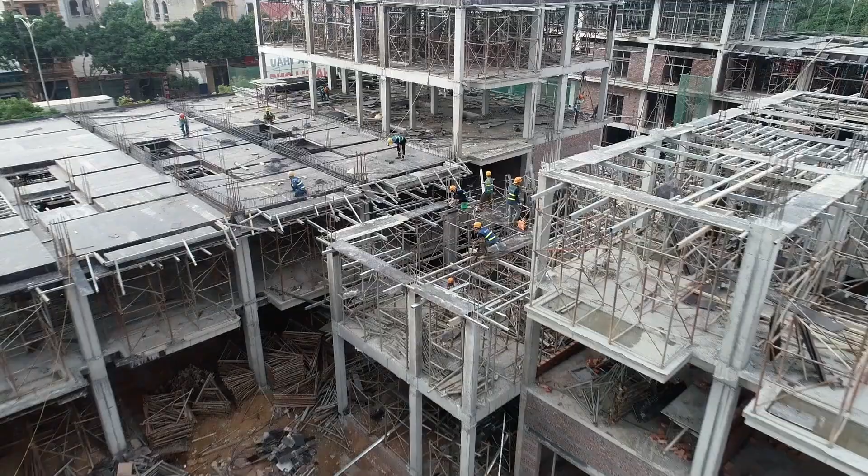Have you ever stared at a reinforcement drawing and felt completely lost, trying to figure out what bars go where, how many you need, or how to calculate their total length? Or maybe you're responsible for estimating reinforcement for beams but you're not quite confident that your quantities are accurate. If this sounds like you, you are in the right place.

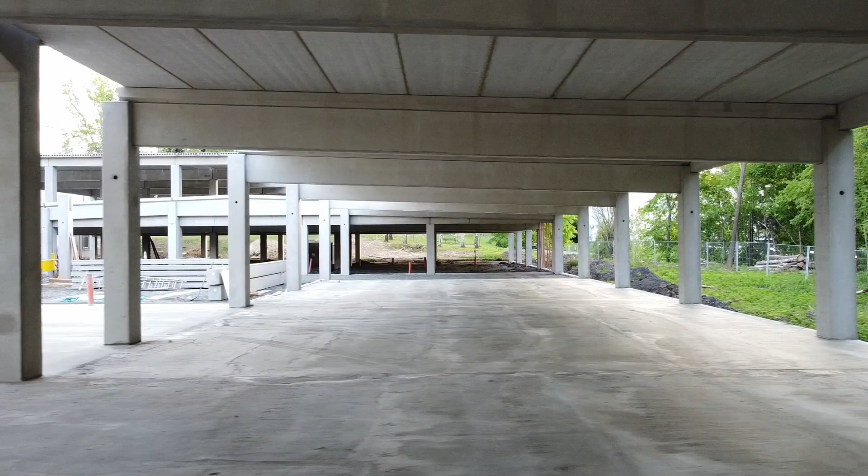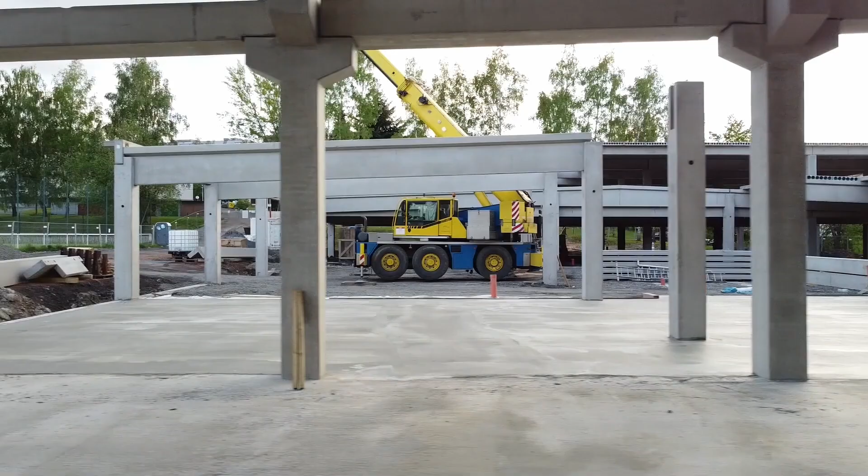In today's video, we are focusing on something every quantity surveyor, estimator, site engineer, or even civil engineering student must understand: how to take off reinforcement in beams. Beams are one of the most essential load-bearing elements in reinforced concrete structures. They serve as the horizontal support system, transferring load from the slab to the column and eventually to the foundation. Because they play a crucial role, they are usually packed with different types of reinforcement: bottom bars, top bars, crank bars, stirrups, anchorage, and more, all carefully designed and laid in structural drawings.

But how do you move from those complex-looking drawings to actual quantities of steel in kilograms or tons? How do you know how many bars are required? What about the length, laps, bends, hooks, and even cutting allowance? In this video, I'm going to walk you through the entire process of taking off reinforcement in beams, step by step, no guesswork, no skipping, with clear explanations and practical examples. Now let's get right into it.

This is a drawing of our reinforced beam. This can be located anywhere - it might be a ground beam or an upper floor slab beam. The main purpose of this video is to provide relevant information on how to take off for a reinforced beam, no matter where it is located. Now let's get into it.

The section of our beam is 450 by 225 - the depth is 450 and the width is 225. Most of our drawings for beams or any structural work are drawn to center to center, so this is drawn center to center.

Now that we know the width of our beam is 225, and it is drawn to center, the first thing to do is make our dimension external to external. How do we get that? Since this is center, that's half of 225 to this side and half of 225 to this side - making 2 of half of 225. When you multiply 2 by half, you get 1, multiplied by 225, so you're adding one 225, that's one width to the dimension, in order to get the external to external dimension.

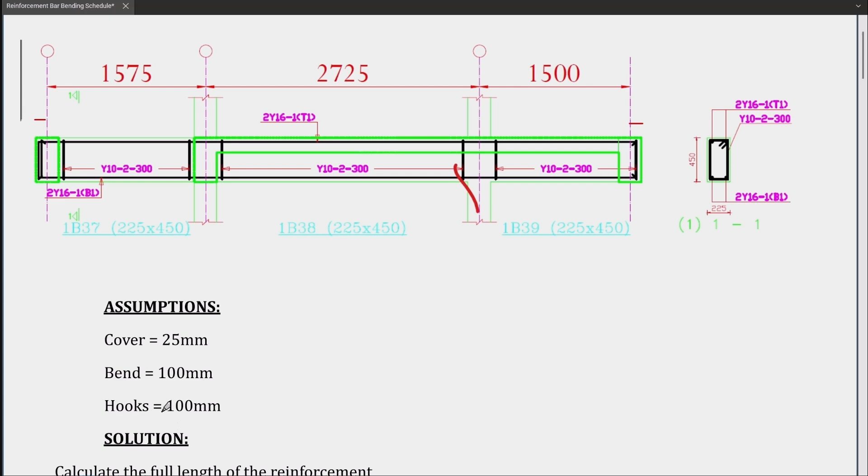So the cover to our reinforcement is 25mm - that means the distance from the face of the concrete to where we have our reinforcement is 25mm. Then this point here, the hook, is where we have links or stirrups. So I'm moving forward now.

The first thing to do is get the total length, that's from external to external. Remember I said half of 225 - that's 2 multiplied by half multiplied by 225, so that's 2 over 2 multiplied by 225, invariably 1 multiplied by 225, plus 1575 plus 2725 plus 1500.

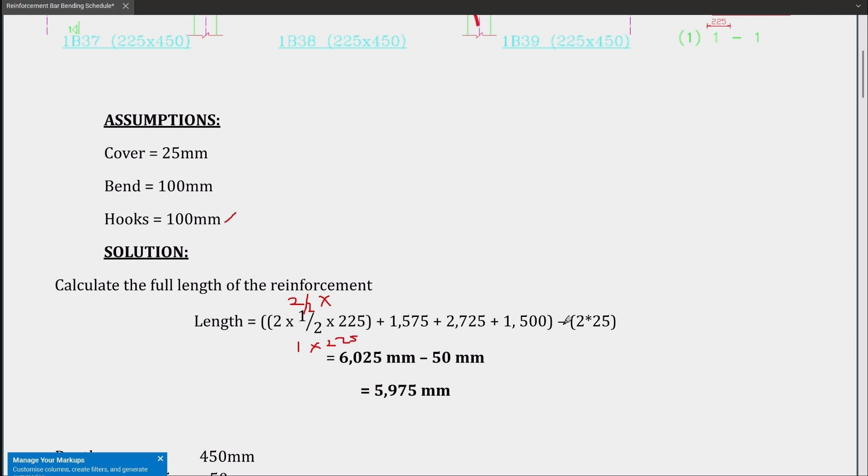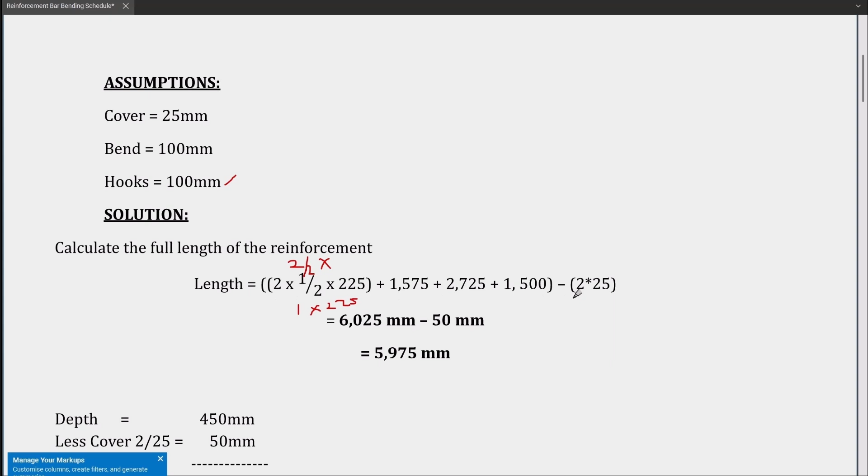This is the dimension here. Remember, we need to get the location of our reinforcement - that's why we are deducting 2 cover: cover to this side and cover to this side, that's 25 to one side, 25 to the other side, 25 multiplied by 2 we have 50. So when we add everything together we have 6025mm minus 50, that's the cover of our reinforcement. After deducting cover from the whole length, we have 5975 - now we have the length of our reinforcement, from this point to this point is 5975mm.

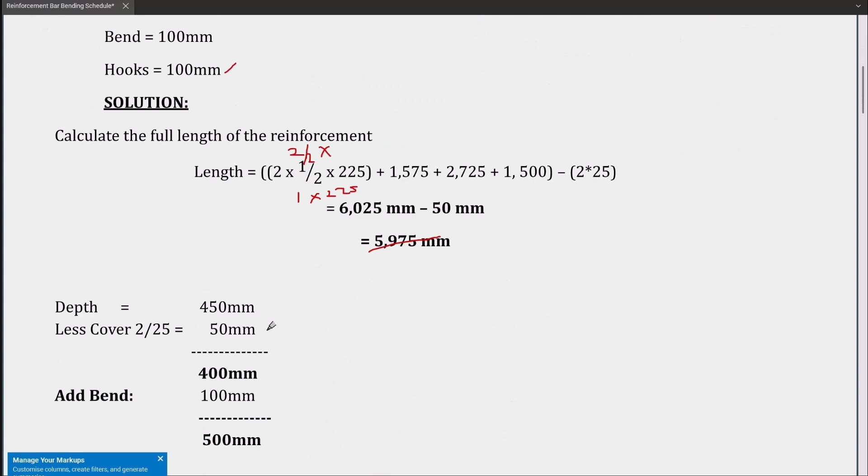We need to get this length also, the length on the depth at this point. Remember we have 450 here, we need to deduct cover also - 25 here and 25 here, 25 multiplied by 2 we have 50, so 450 minus 50 we have 400.

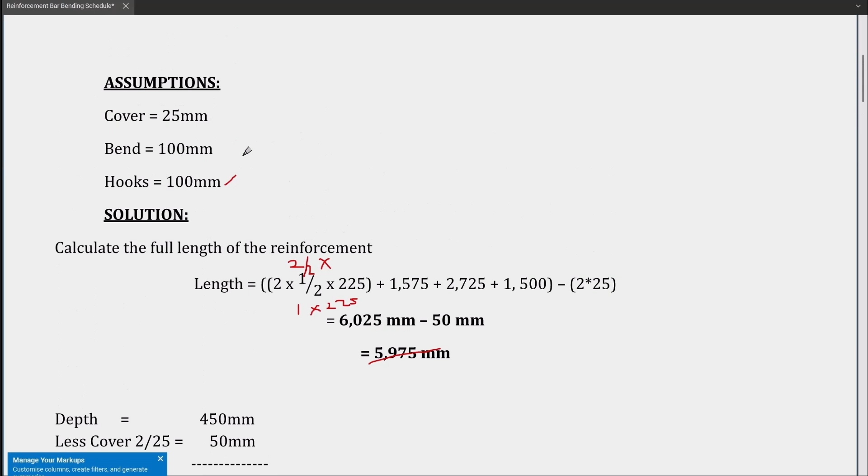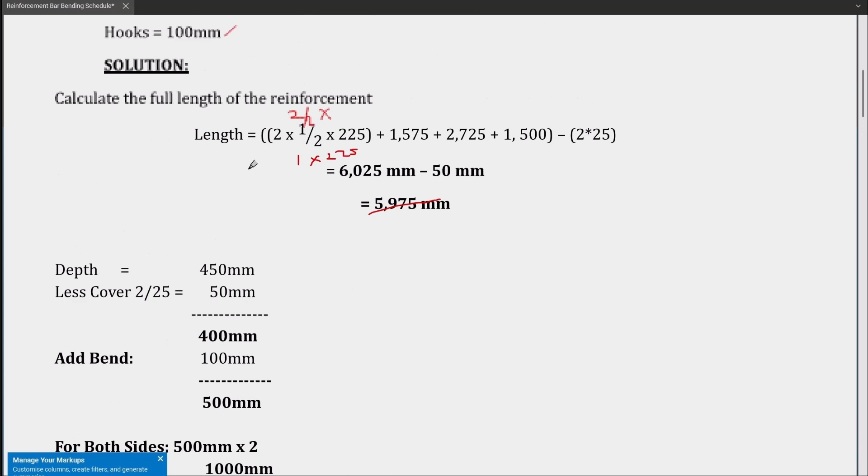Remember, we have the bend here, so we'll be adding bend to one side - we can't add both sides, so when we need to multiply, that is when we multiply by 2. If we multiply by 2 it's going to be over-measurement. So 100 here plus the 400 we calculated here equals 500. From the point up to this curve is 100mm. Since we have two sides, it's going to be 500 multiplied by 2 equals 1000.

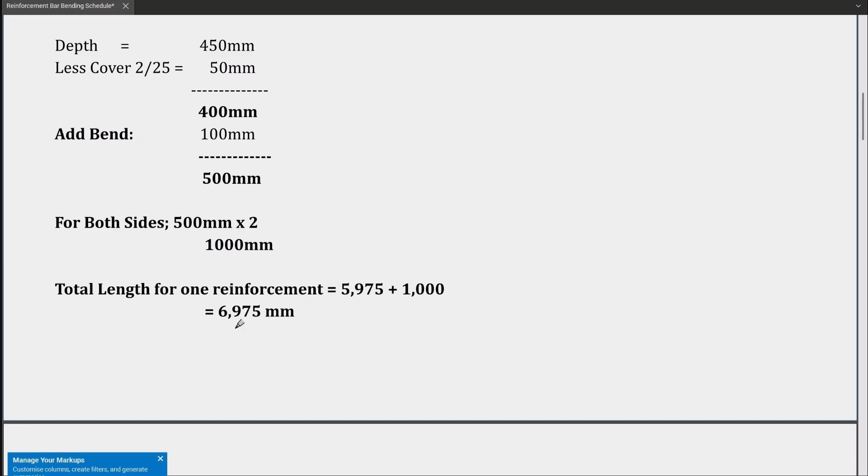In order to get the total length of our reinforcement, that's one reinforcement, from this point to this point, up to this point, going along this line to this point and back here. So when we add them together, 5975 plus 1000, we have 6975mm. So the total length of one reinforcement, from this point to this point, is 6975mm. So moving forward, the quantity - we have 2 here.

This is the quantity of our reinforcement, this is the diameter, this is the bar mark, and this is the location - this is at the top. So we have 2 of 16mm at the top and 2 of 16mm at the bottom, and it is one quantity. So that's 2 multiplied by 2, we have 4, multiplied by 6975, we have 27,900mm or 27.9 meters.

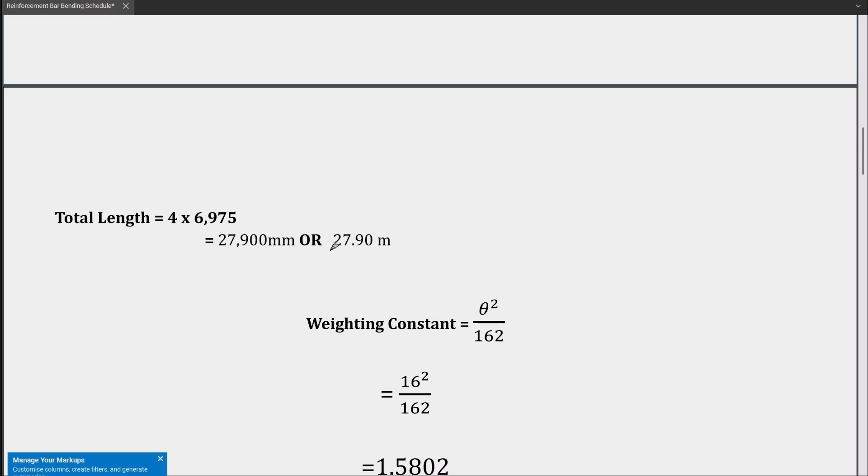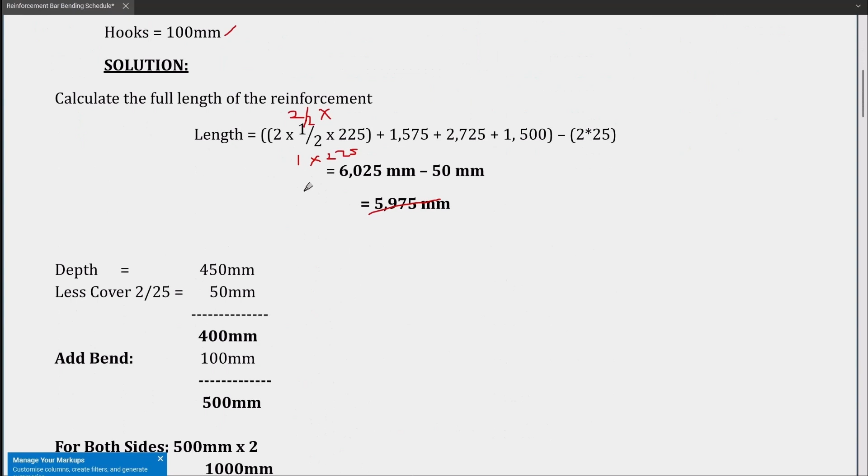So we need to calculate the weighting constant, that's the weighting constant of our reinforcement. Since we are using 16 mm from this drawing, it's going to be diameter square divided by 162. This is a standard formula for calculating the weighting constant of any reinforcement.

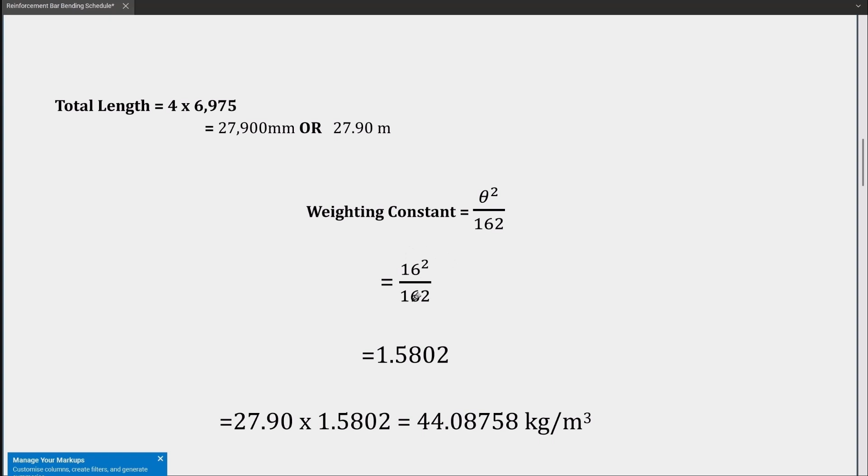If you have 8 mm, you do 8 mm square. So any diameter that you have, to get the weighting constant, you square the diameter divided by 162. Since we have 16 mm, 16 multiplied by 16 divided by 162, we have 1.5802. So in order to get the total quantity of our reinforcement in kg per meter cube, the total quantity we calculated here, that's 27.9 meters, multiplied by 1.580, we have 44.08758 kg per meter cube.

One of the reasons why I write the whole formula without rounding it up until the last part is, reinforcement is very expensive and any mistake can cost a lot. So that's why I leave it until the last part in order to round it up.

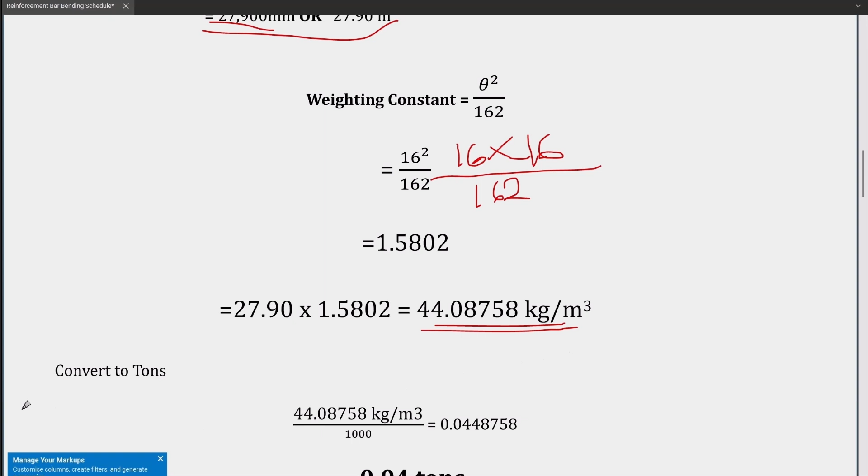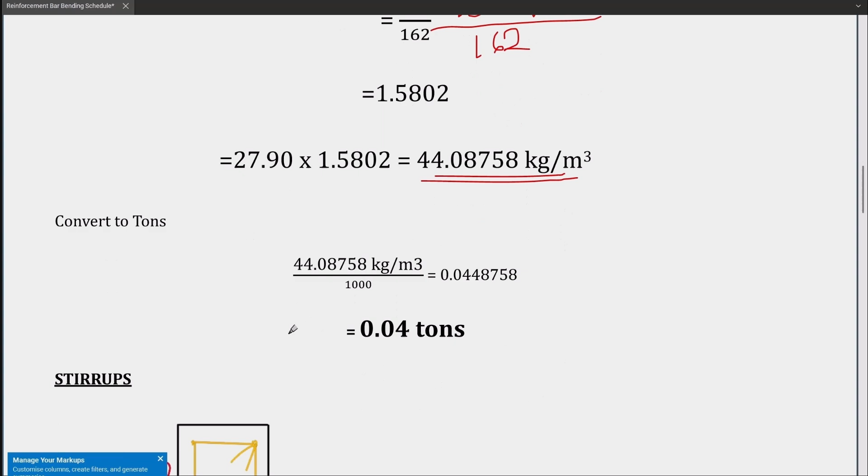So in order to convert to tons, we divide this quantity by 1000. Dividing 44.08758 kg per meter cube by 1000, we have 0.044875 tons. When you approximate, you have 0.04 tons. So for this beam, it's going to take 0.04 tons of 16 mm reinforcement.

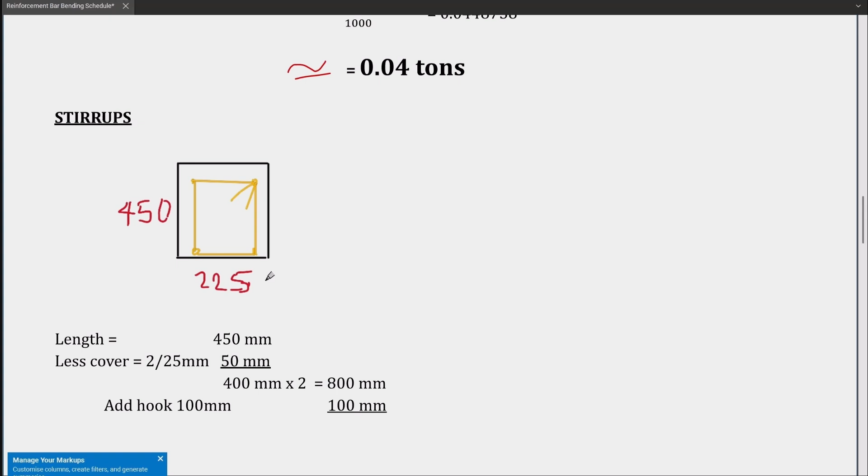And don't forget, we have in between, that's links or stirrups. So now let's go and calculate the links of the stirrup. This is our stirrup. Remember the section 450 by 225 - our length is 450, our width is 225. So in order to calculate the reinforcement here, we need to do the same thing.

450 mm minus 25 mm, that's the cover from this side and from this side, that's 50. So 450 minus 50, we have 400, and it is of two sides, so multiply by 2, we have 800. Remember, we have this hook here and we said it's 100, so plus 100, making 900 mm.

The width we need to calculate for this, we're going to deduct 25 from this side, 25 from this side also, in two places. So we have 225 mm less 25 multiplied by 2, we have 50. 225 minus 50, we have 175 mm multiplied by 2, we have 350 mm. We're going to be adding the hook also, that's plus 100, that's 450 mm. So the total length of our stirrup is 900 plus 450, we have 1350 mm.

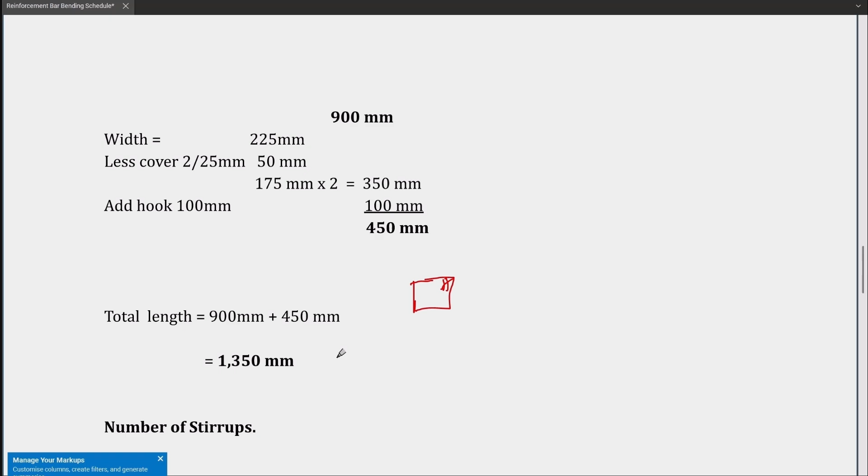And don't forget, we need to get the total number of stirrups, we were not given. So now let's come to our drawing. From the first one, that's 1B37, from this point to this point, we are going to be getting the length. So what we need to do is, since this is half, we need to get from this point to this point.

We are going to be deducting 225 from this - half of 225 from this point, half of 225 from this, that's 225, in order to get the length from this point to this point, and we are going to be dividing by center to center. Before moving forward, this is our diameter, this is the bar mark, this is center to center dimension, that's the distance between - let's say we have 1, 2 - the distance between one stirrup to the other is 300.

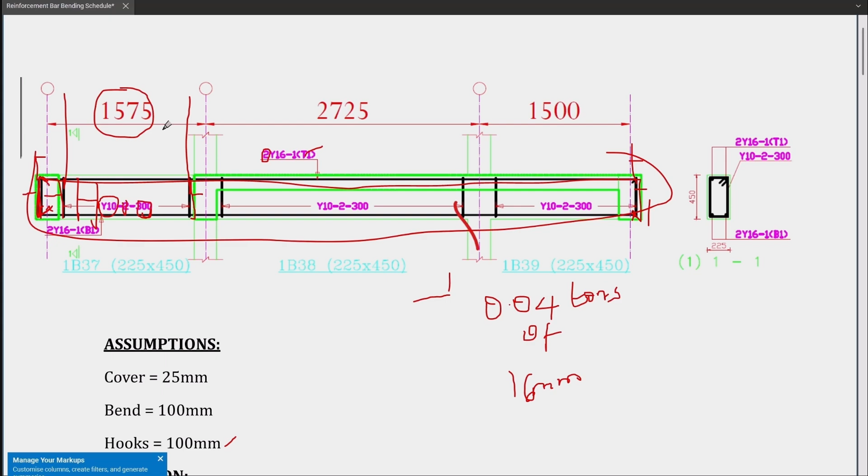So the first thing to do now is 1575 minus 225. Let's come to the calculation: 1575 minus 225, we have 1350, divided by 300, that's the center to center dimension, we have 4.5. So when we approximate this, we have 5 plus 1, making 6.

Where do we get this plus 1? At this point up here, we are going to be having one reinforcement, so that's not taken into consideration when we are doing our calculation, but we usually have one to tie it at the end here in order to secure our reinforcement. So that's the reason why we normally add 1 to our calculation. I hope that is clear.

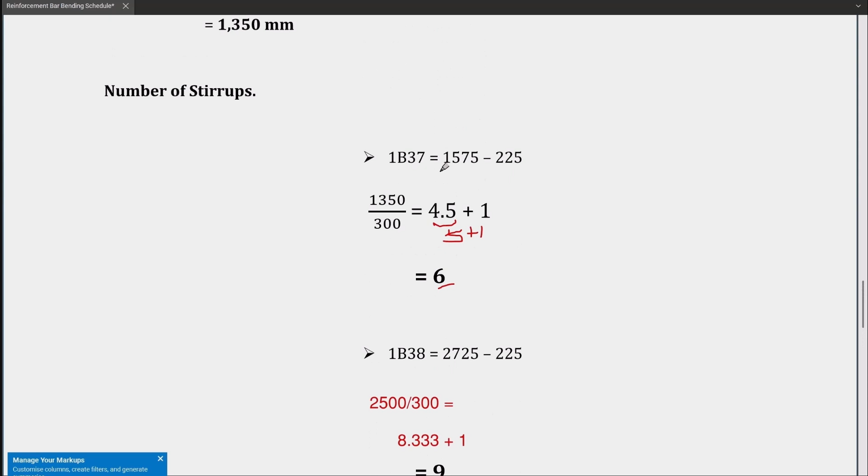So now that we have 6 for this point, we are going to come here to calculate this also. For the second one, 1B38, let's come here: 2725 minus 225, so that's 2500 divided by 300, that's 8.33. So when we round it up, we have 8 plus 1, making 9.

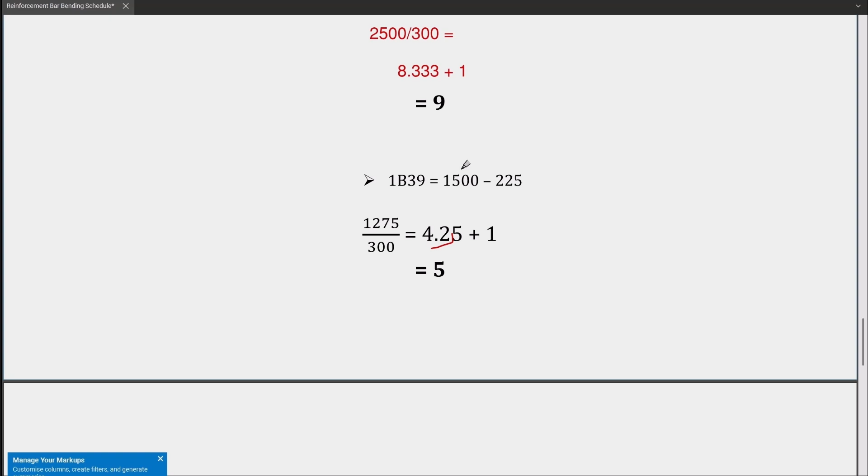So for the last part, we have 1500 minus 225, 1275. When we divide by 300, we have 4.25. When we round it up, it's not up to 5, so this becomes 4 plus 1, 5. In order to get the total number of stirrups or links that we have in between our beam, we are going to be adding the first one, 6 plus 9 plus 5. So the total quantity 6 plus 9 plus 5 equals 20.

The total length for our stirrup is equal to the total length here, 1.350 multiplied by 20, we have 27.00 m. Don't forget, the diameter of our reinforcement is 10 mm. So in order to get the weighting constant of 10 mm reinforcement, it's going to be 10 square divided by 162 multiplied by 27. So 10 square divided by 162 equals...

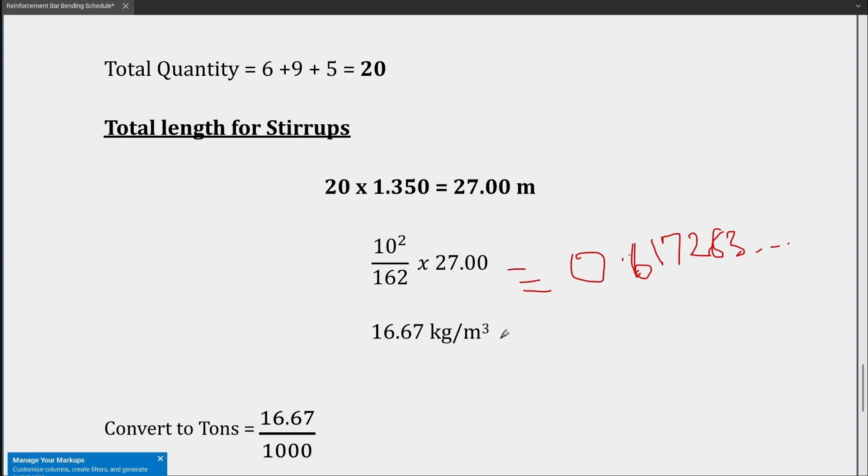0.617283 and so on. We multiply this by 27, we have 16.67 kg per meter cube. In order to convert this to tons, it's going to be 16.67 divided by 1000. We have 0.02 tons. And that's all for today.